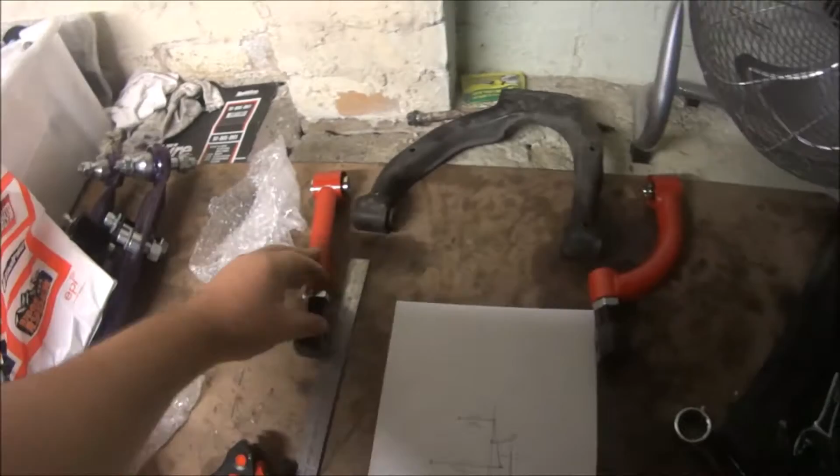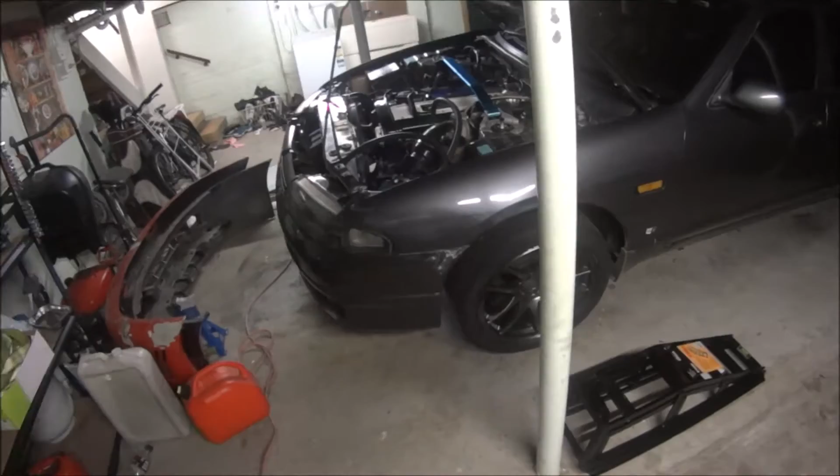Firstly, these arms aren't adjustable once they're on the car. They're entirely adjustable off the car, but not on the car, which means when I put them on, that's it - whatever camber they're at, that's what I'm going to have, unless I take them all off again, adjust them, and put them back on. I don't want to do that.

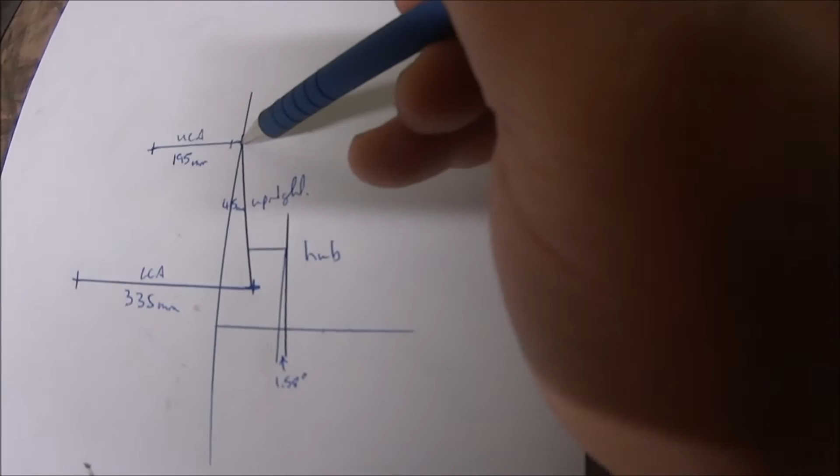So I'm here doing some math, and here's a bit of a diagram of the suspension configuration. Now it's not perfect - these arms aren't horizontal. This one points up, this one points down slightly. This is the upright; it's not on that angle.

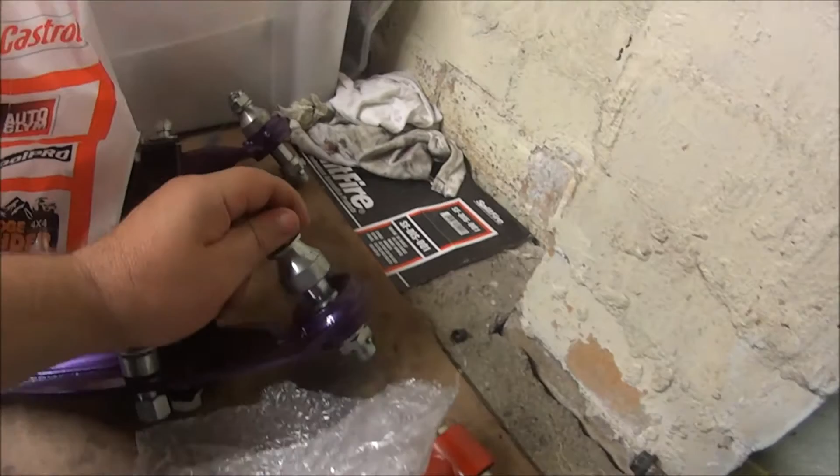That angle is sort of irrelevant, I've worked out. But I know the length of that arm, and I know the length of that arm. That's difficult to measure because of this type of joint - here's some control arms I prepared earlier. So where do you actually measure that to? I've sort of measured it to something like the middle of the joint, as best I could.

This is not going to be perfect. This is not a permanent solution. This is going to get me my 3 to 4 degrees camber by the end of the night, hopefully. If not, by tomorrow night.

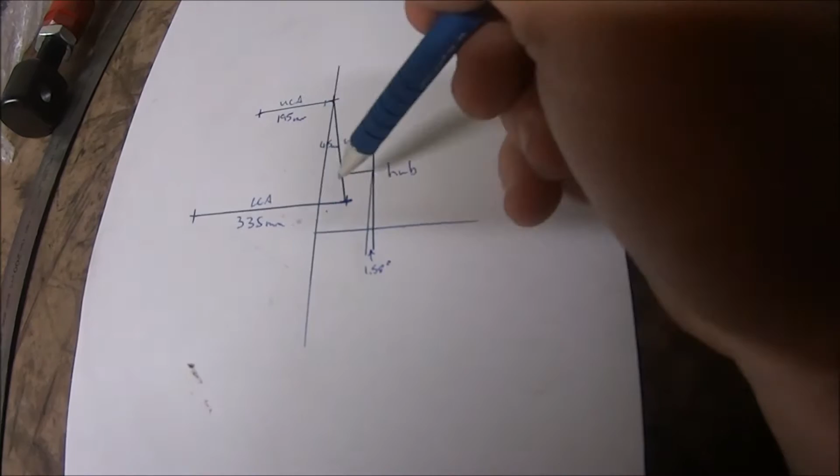I've got a measurement of 335 for here, 195 for here, and then you extend this out. The hub is at 1.58 minus 1.58 degrees, because this is my current camber. So the hub camber angle is fixed.

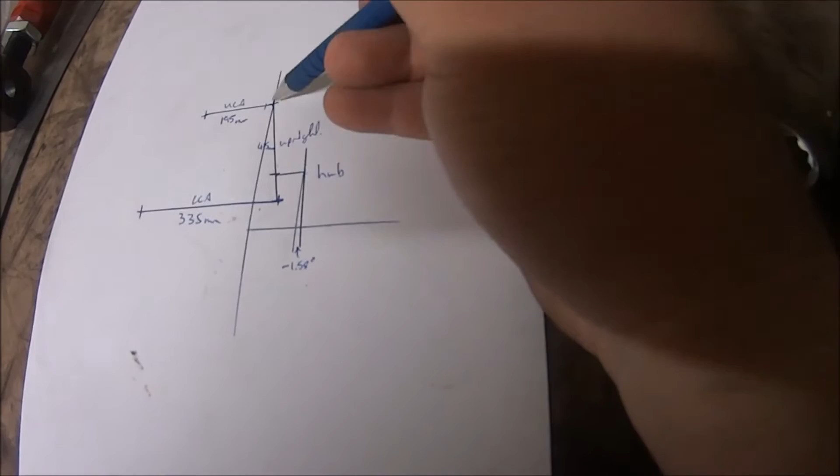Where was I? Yeah, that's right - so the hub angle is fixed relative to this angle. Whatever that is, it should shift close to 1-to-1 with it, I think.

So by shortening this, we'll lean that over, and I'll lean that over by the same amount. Therefore, this triangle here is relative to this triangle here, and I should be able to work out another triangle here. If that angle is more than that angle by the amount I want to move this angle, then this distance is how much shorter I need to make these arms, if that makes any sense.

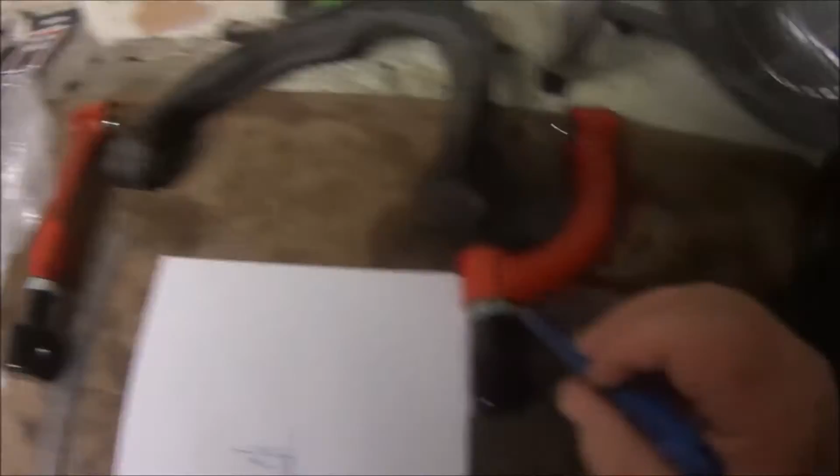And then I match all the arms up perfectly so that they're all the same. Put them in, because the bushes are pretty good in these upper control arms. Well, I don't know about the one on this side, but this one was pretty good - there's absolutely nothing wrong with them. There's no play in them, so that means I should be able to just set these, bolt them in, and have the right setup.

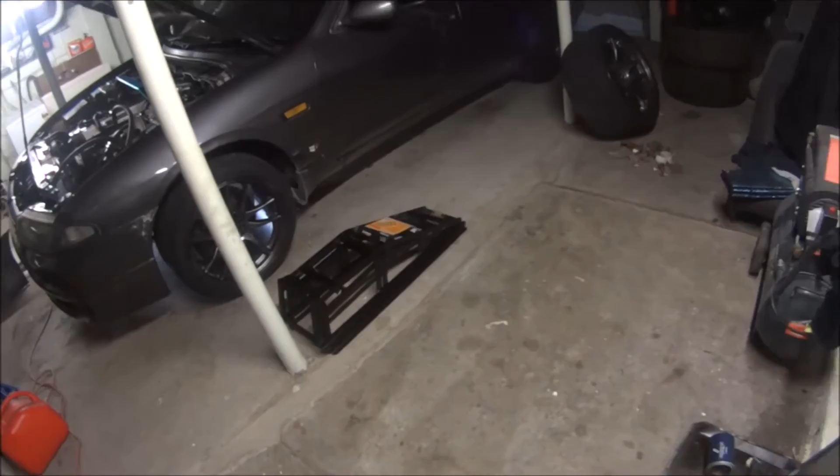I have got some ramps as well. Now the purpose of the ramps is to be able to load the car on the wheels to tighten these up, because these will want to go up and down with the load, and they should be in the loaded position when I tighten them up.

When I undid the bolt through the upright, it flew up - it was loaded up that way, so it was in the loaded position when these were done up. So I'm going to replicate that. That's what Nissan wanted, that's what I'm going to do, and that's what I'm going to do now.

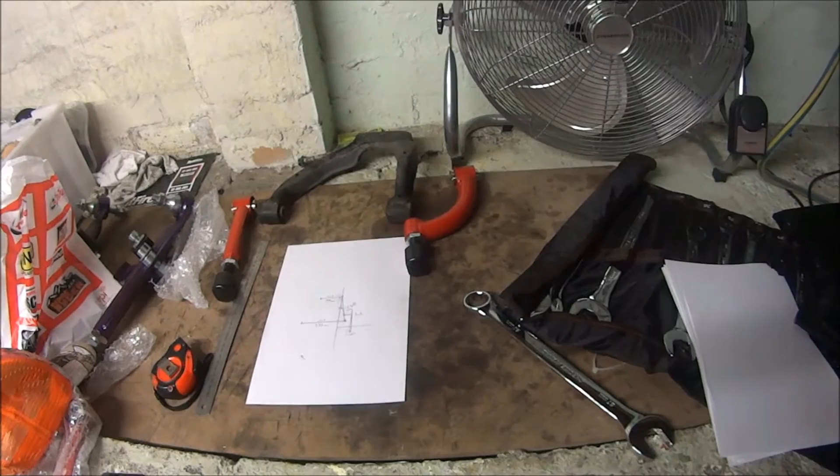A bit more math to figure out that length. Okay, for those of you who don't like maths, skip the next little bit. Here's my two triangles - this is the triangle that I have, and this is the triangle I want, which is that one.

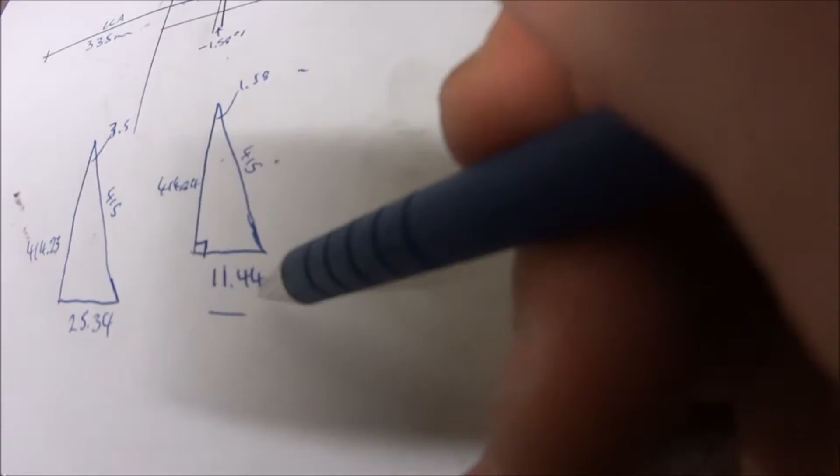Now, this with a 1.58 degree angle, with a 415mm hypotenuse - the long side of the triangle, being a right angle triangle - gives me 11.44mm length down here.

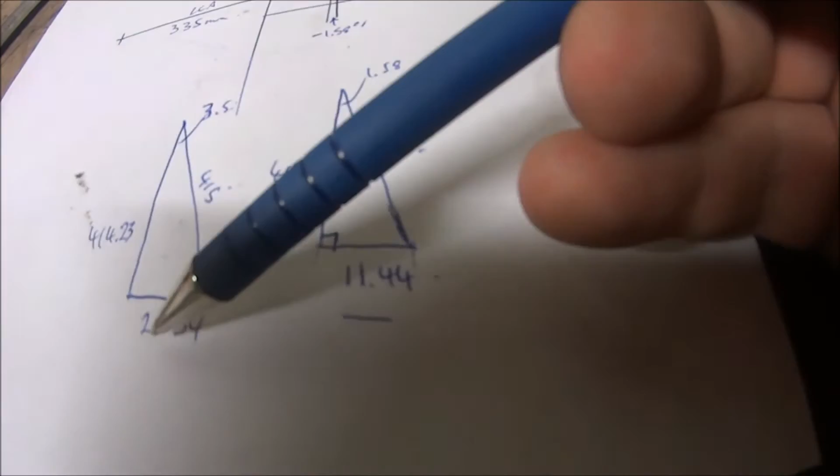This one here, I've got 3.5 degrees, 415mm hypotenuse. That is fixed because that's the length of that upright. No matter how much you lean it over, it's going to be the same length. This height will change, this will not. And it does change slightly, but that gives me 25.34mm on the base of this triangle.

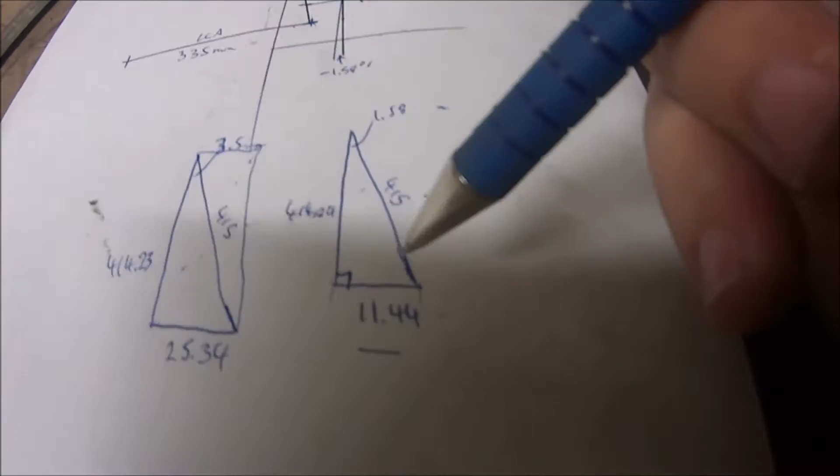Now, because triangles work like this, that triangle is the same as that triangle. That distance up here is equal to that distance down here, the same up here. So I know now that's that.

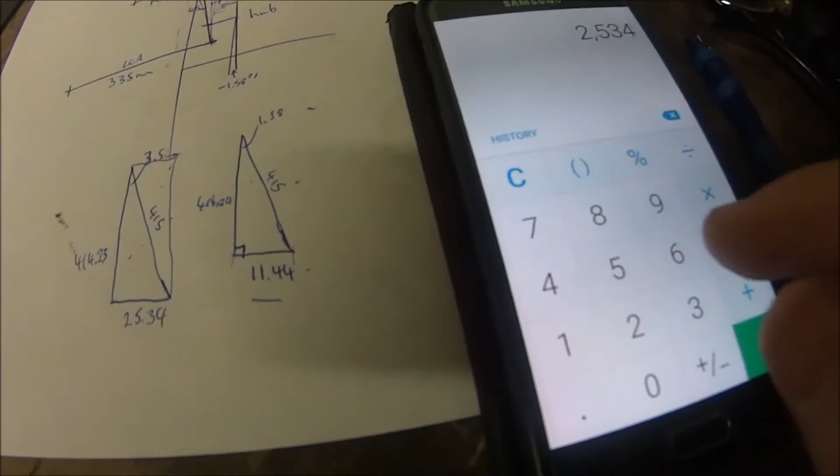I need to make that, I need to make that. So the difference is what I need to take out of the upper control arm, which is, so 25.34, that's a lot of numbers, minus 11.44. So the difference is 13.9mm.

I'm feeling generous, I'm going to round that. So we need to move this upper control arm in by 14 millimeters. So 195 minus 14 is 181. That's my target length for the upper control arm.

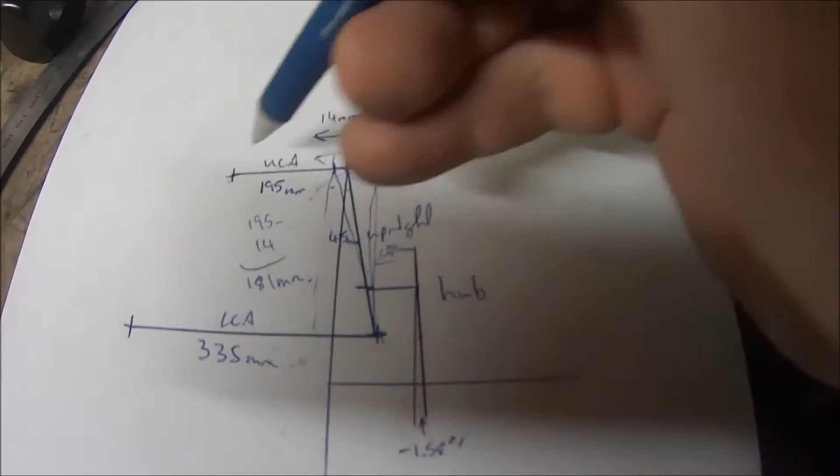Now these are the same, so I just set them both to the same, set all of them to that, bolt them in, and I should have 3.5 degrees at the end of it.

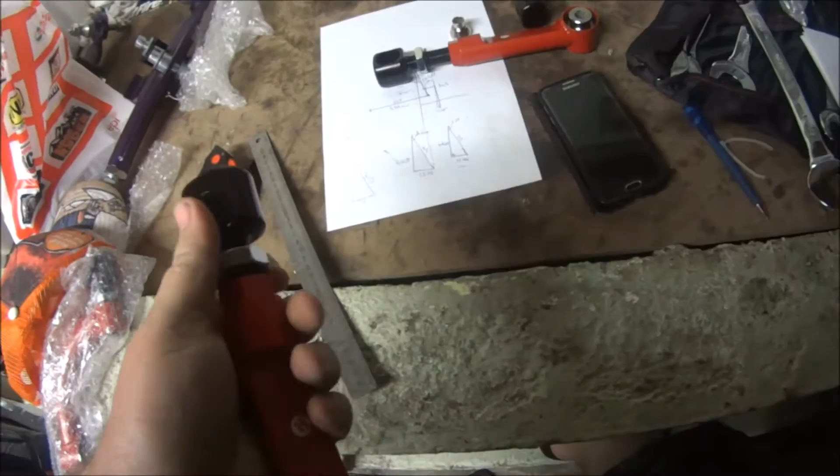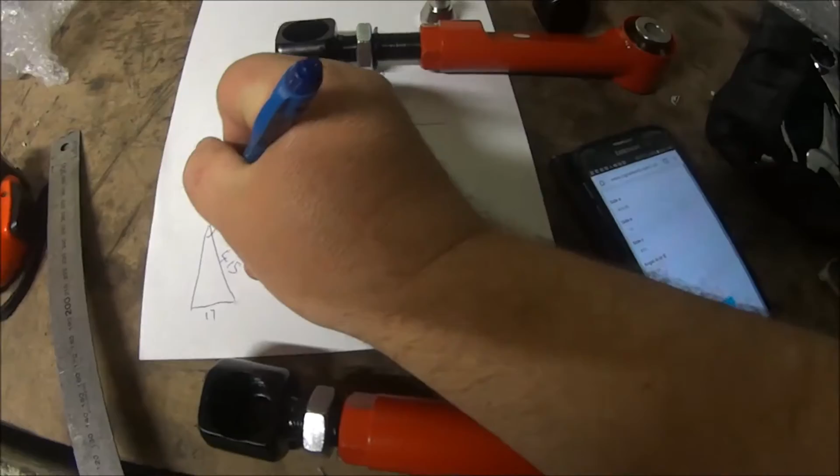Well, I got some complication here. This arm is bottomed out at 186 millimeters instead of the 181 I was targeting. That means, and I've done the maths here, that gives me - and I haven't written it down, what do I work it out to be - 2.35 degrees of camber in that triangle.

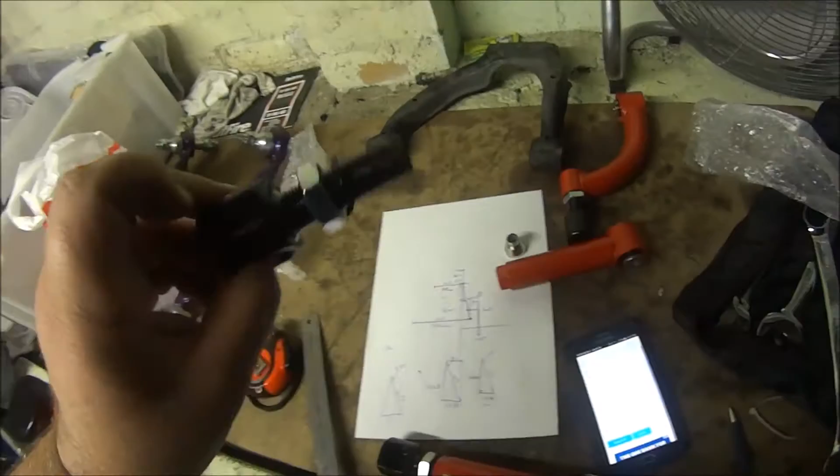So that's not enough. I've pulled this out quickly, have a look. What I'm going to do is cut them. This shaft is quite long, so I see no problem in cutting 10 mil off the bottom of it, threading it back in. It should be golden, I hope.

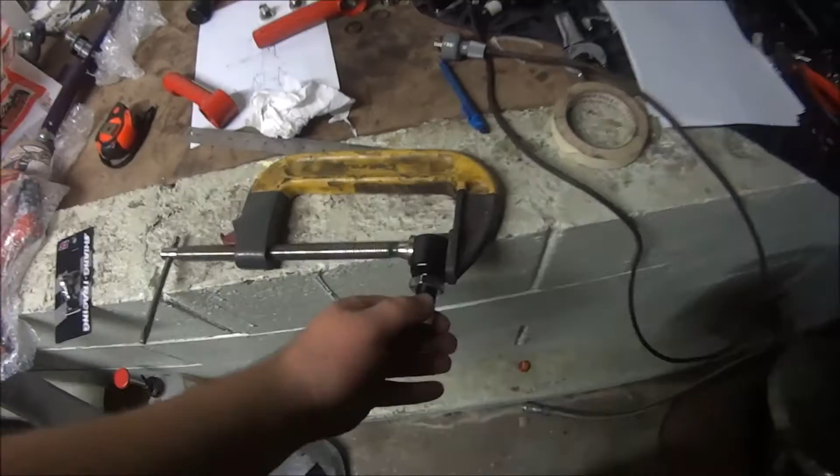Okay, this is prepped for cutting. I've marked the 10 mil with a bit of masking tape. I've put it in the clamp because vices were on special the other day, and I thought, oh, I don't have any jobs where I'll need a vice coming up, so I won't bother buying them. I'll wait till they're on special next time. So I'm doing this again.

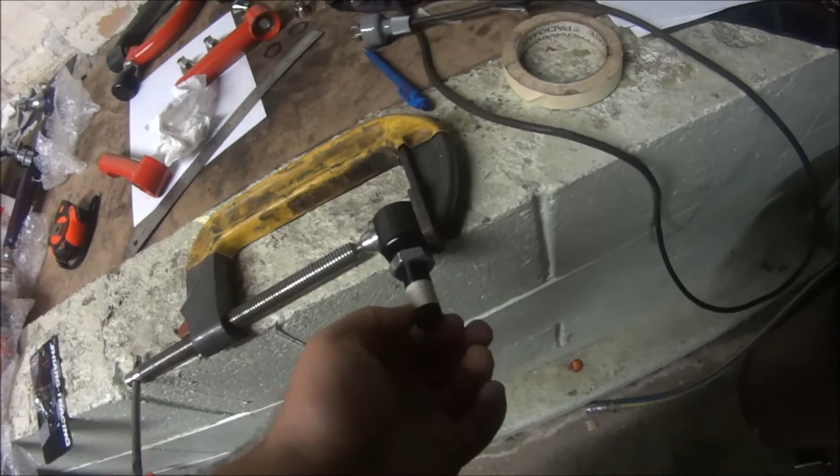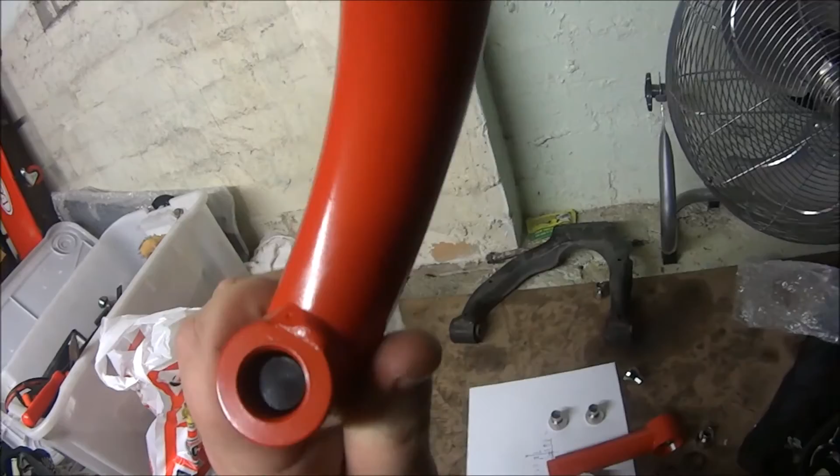Angle grinder cutting wheel. Now I've left this nut on. This is on purpose. So after I've cut it and I give the thread a bit of a clean up - well, not the thread, just taper the cut back a little bit - I can wind the nut off, and that should help deburr and clean up the thread to make sure I can get it in there. The other arm doesn't matter, it's got a hole right through, so I can push that one in as far as I need. So trying to cut that one and its mate, which is there.

Always remember your safety gear - in thongs, bare hands. Although you don't want to wear gloves around rotating tools anyway, liable to take something off. So here we go. It's definitely a tool steel or something, so that's a positive note.

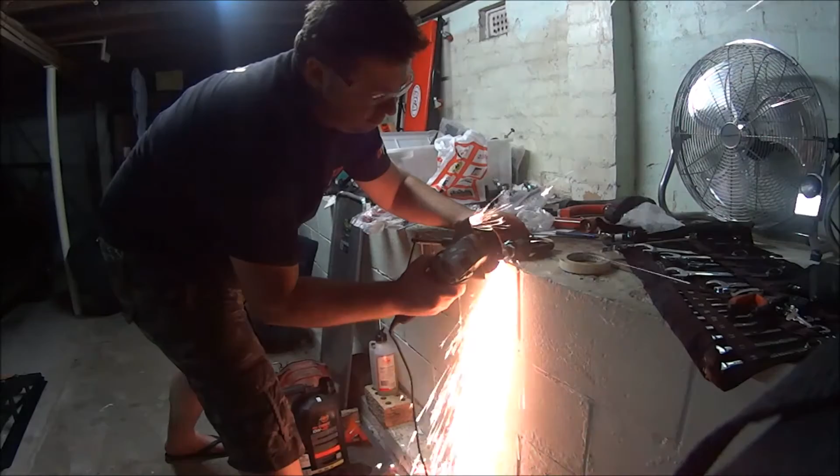That's why you want to buy it. If need be, you know, you just let that go.

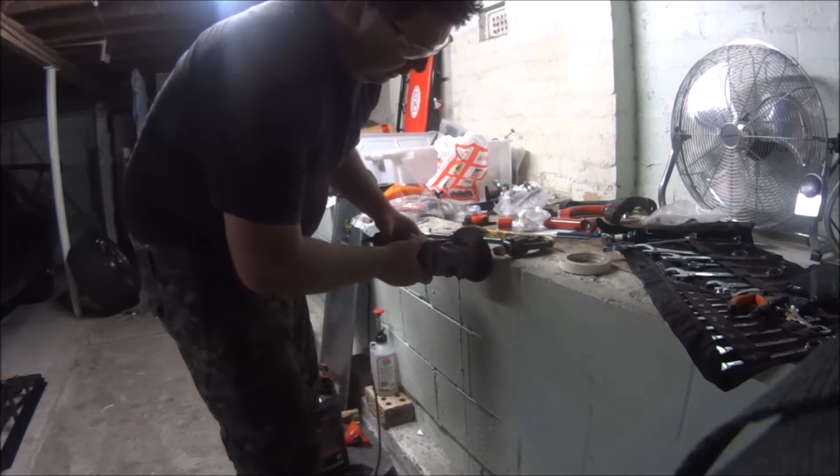Also, why you don't see me cutting with my head in line with it, so I can see the cut. I always have my head off to the side, looking at it here, because if it does bite - if you're cutting down to up, which you don't want to do - it'll grab that way. So cutting from the top down, it's going to pull it away from you, which is what it did just then. And then it caught in the guard, which meant it just grabbed it, and I was able to just flick it off with my thumb. But if it didn't catch in the guard, it would go that way. If you're cutting down here to get sparks away from yourself, it's going to bite, it's going to go right into your face or your arm or whatever happens to be in the way. It's never pleasant when it grabs, but it's not a 9-inch grinder at least, which is far, far worse.

Still pretty warm, to be expected.

Still hot, don't touch it, kid.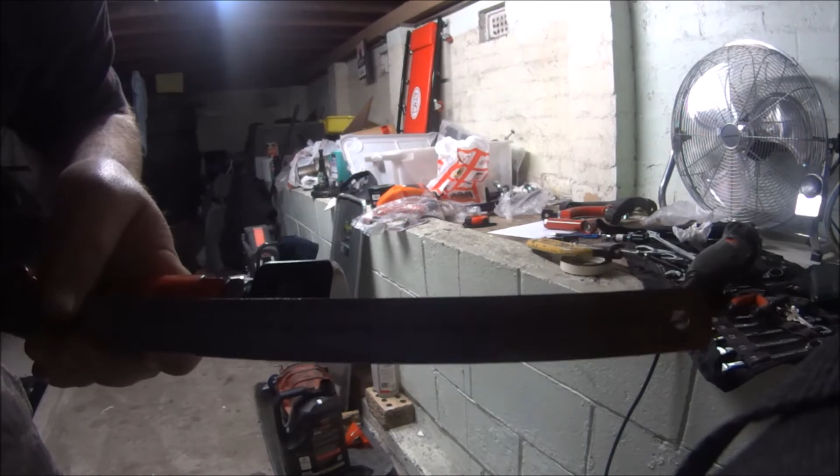So that's our new shortened item. That should go in far enough. Before I cut the other one, I'll test fit this one. Our target was 181. I don't know if you can see that, but that's approximately 178 there. It's bottomed out, so that's pretty good.

Do the other one. Alright, there's the second one. Good to go.

I'm an idiot, I put that on the wrong side, but for the time being, let's just double check this measurement. It's also in the 170s, high 170s, which is all we need. Now let's undo this and put the washer on the right side.

Okay, 2 modified adjustable arms. Let's double check that this will wind all the way in. So it's biting up a little bit, but I think it's just because of the paint on the end. I wouldn't have painted all the full depth of it, but that goes through, you can see, and out the other side. So assuming they can get to 180, measurement from there to there, it's 20, that's 193, minus 20 is 173, so that's fine.

So what I'm doing here is using this ruler, getting it tight to hold as a nice straight edge, and measuring up to where the arm will be from there, and this is accurate. I want 200 millimeters to the center, and you know what? It's dead on. That is 200 millimeters from there to there.

Now I want 180 from there to there, and I've measured this, and it's 40 mil across. So therefore, from the edge to the centre is 20. 200 minus 20 is 180. So I want 1 more millimetre. I want 181. Let's wind it out.

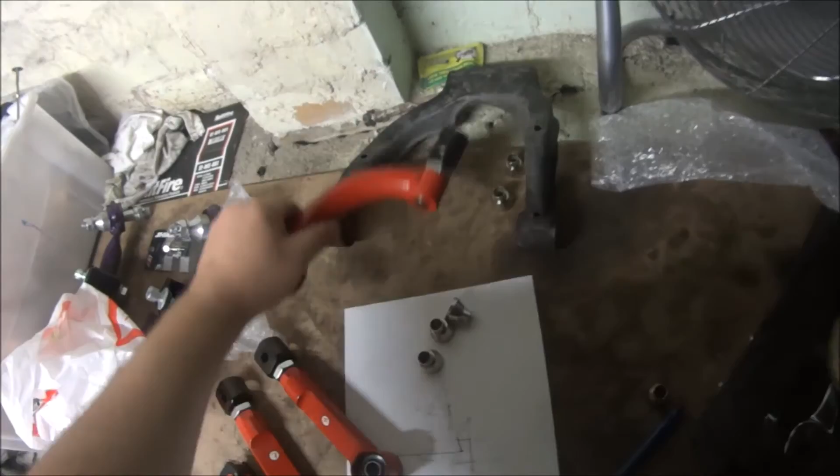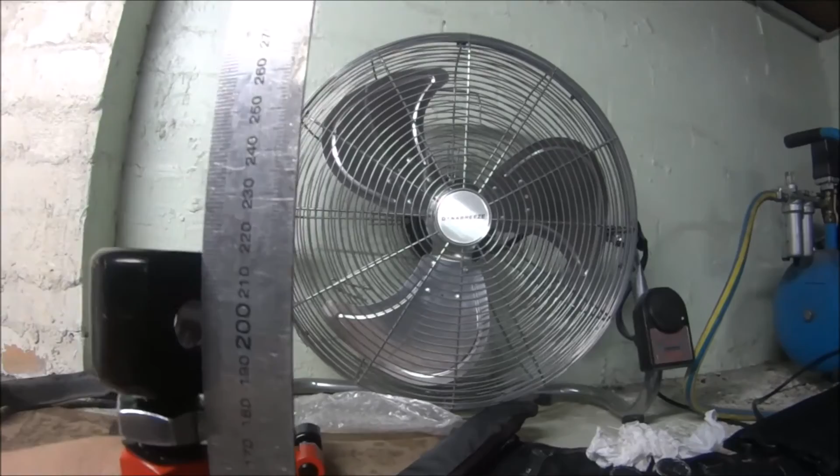Okay, I've done those two, matched them up. They're exactly the same. Same thing here with this one. I'm looking for 200 to the centre of the hole, or 201. What I'm finding is it's a bit too far away or a bit too far under, so I'm sticking to 200 to 201 to keep them all the same. It's just literally the difference in when the thread started to cut, so it's not much, but there is a very small difference in there. Having said that, it is fine, and that is 200.

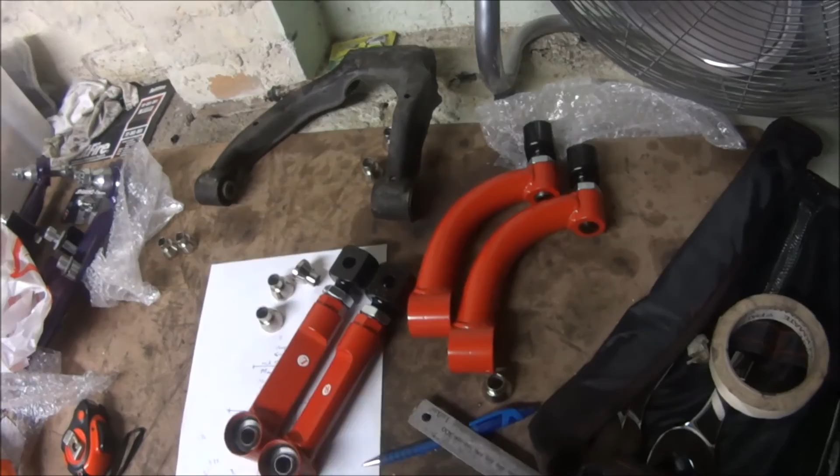Okay, all 4 arms are ready to go in. The other complication we have is because these aren't really adjustable on the car, for the same reason, I can't really do these up tight because these faces need to bolt hard against their relative faces and all need to line up. So I need to be able to pull these up. They'll rotate slightly to pull flat on that surface and flat on that surface when in the car. And to do that, I need the load on the car.

Once again, that's what the ramps are for. But I need to do them up first and then nip that nut up to prevent it from moving. It shouldn't move anyway, once those are tight, it really hasn't got anywhere to go, but it could rotate slightly, I suppose, and add movement to the system in either direction, but not very much. Anyway, let's see if we can get a side in.